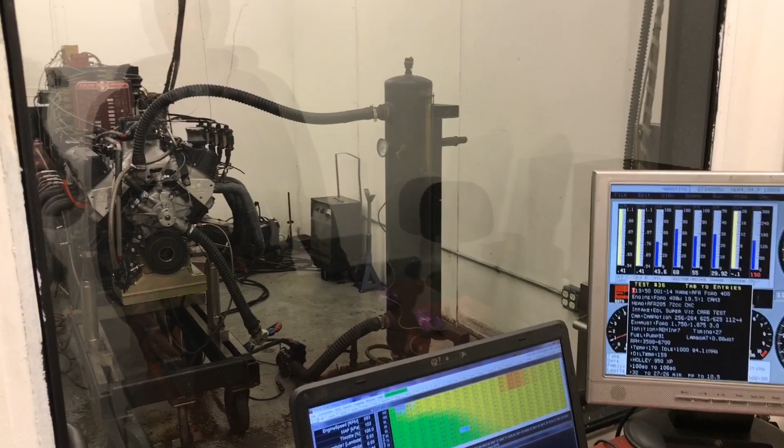So, yeah, we decided to put a carburetor on it, see what it does, and here we go. We had to do a lot of messing around with the jets to get this thing to even run right. So needless to say, fuel injection is a lot easier to tune, or at least get it consistent and right.

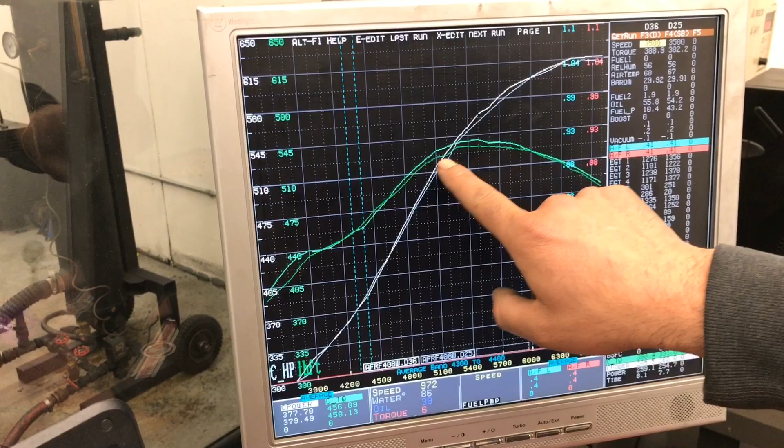So as you can see, this bright green is our carburetor run right now, and the light green is the run before with the EFI on it. Looks like it's repeating pretty good. Now, we actually still are using the coil on plug system from the AEM to control the spark, so we have the exact same timing graph.

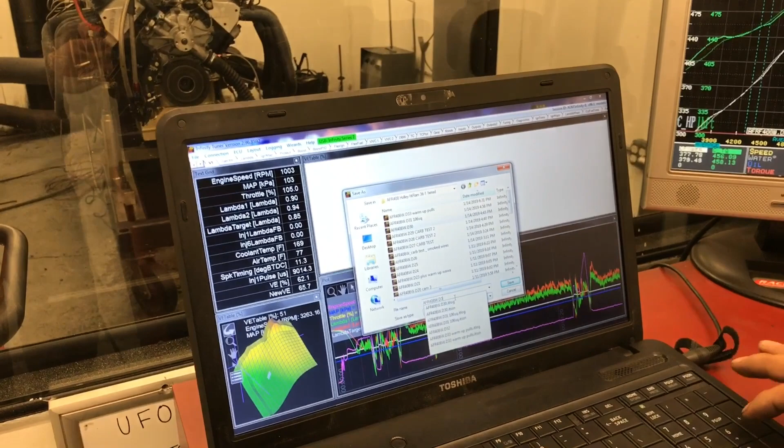And it's also telling us where our air-fuel ratio is with the carburetor. And I'll show you something right now that you'll see what we're talking about. Let's see here, save this real quick.

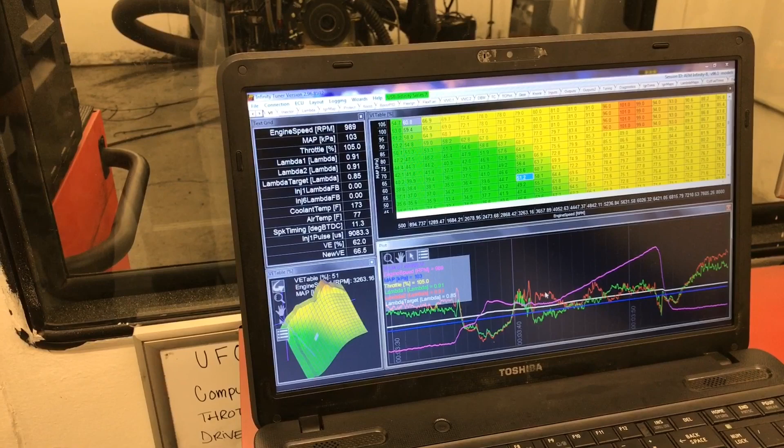So, we got our red and our green, that's our left bank, right bank, air-fuel ratio. The purples are RPM, and you can see with the carburetor, it's kind of all over the place. So here's kind of lean, here's rich. The white line is what our target is. Now, obviously, the computer has no control over the fueling part of it, but it still does the same timing.

So you can see where, with the carburetor, oops, let me open the save session. There we go. Just keep doing things to fuck this up for you guys, but it's all right. We'll get there.

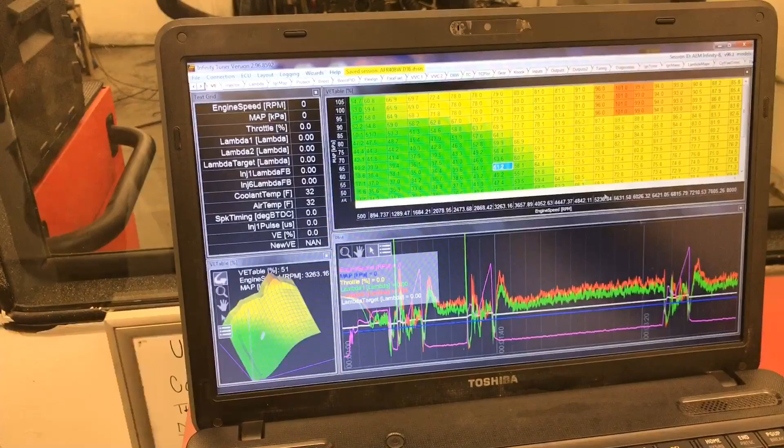Okay, so back to the last run we just did here. You can see where one bank goes lean, one bank goes rich, and then they cross over and do all kinds of fun stuff depending on what the pulses are doing now. That's the beauty of fuel injection. This is with a carburetor. It's kind of all over the place.

You can see that our lambda target, we try to keep to the same target level there. I'll pull up a graph right now, our last run with the fuel injection that we did, overlaying the graph, and you'll see the difference in what the air-fuel ratio looks like, left bank to right bank with fuel injection. And consistency is key whenever you're racing or driving on the street.

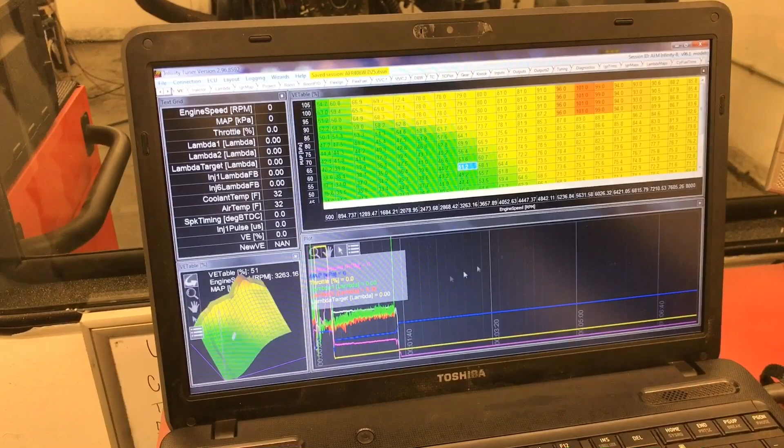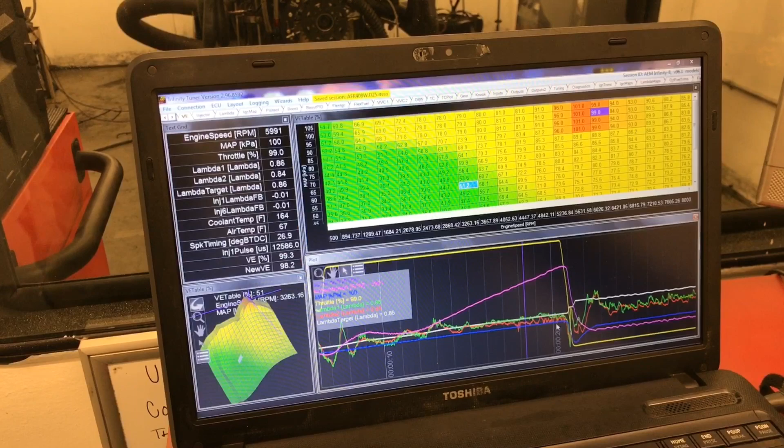Drivability, consistency, and just the ability to repeat. And that's one thing that fuel injection has over a carburetor, night and day. You can see that it's just staying pretty much right on target, keeping it close. You don't see big wide swings up and down across the RPM curve.

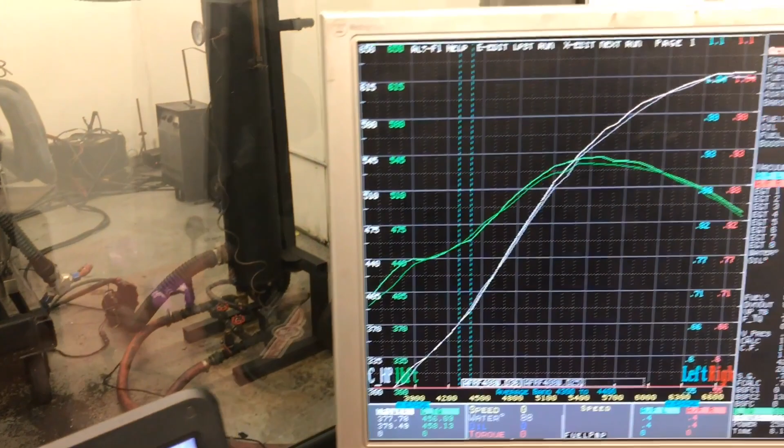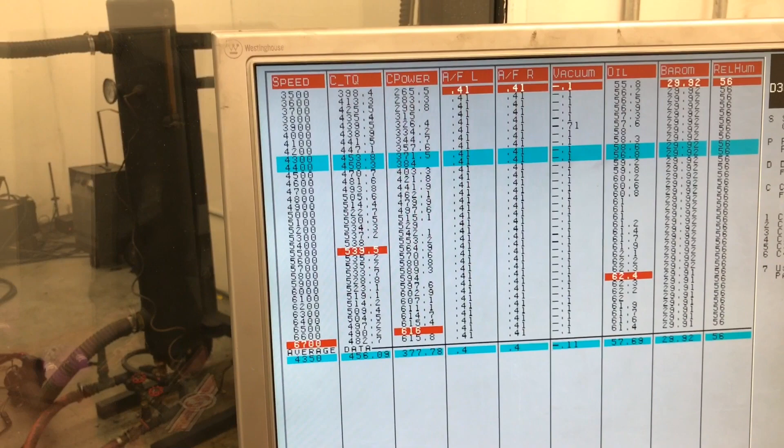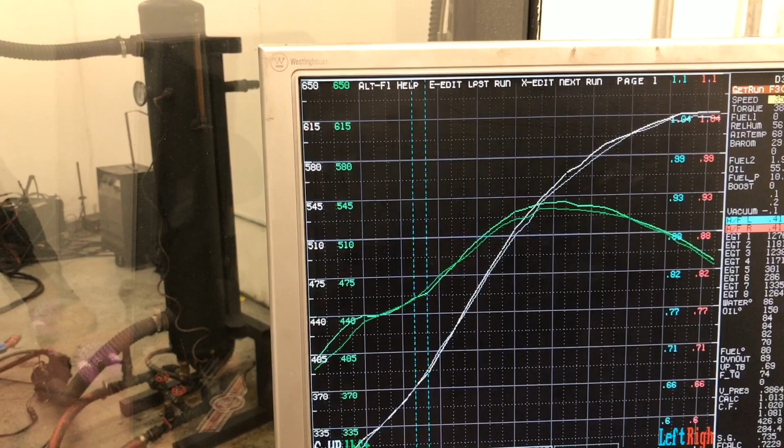Alright, so here's our numbers. This is what we did with the carburetor just now, pretty much just overlaid on the graph. Made a little bit more horsepower, I think like 3 more horsepower, and a tiny bit more torque. And I think that's because we weren't able to really keep that same air-fuel ratio. Notice the carburetor was a little bit leaner up top, which is the explanation for the more horsepower.

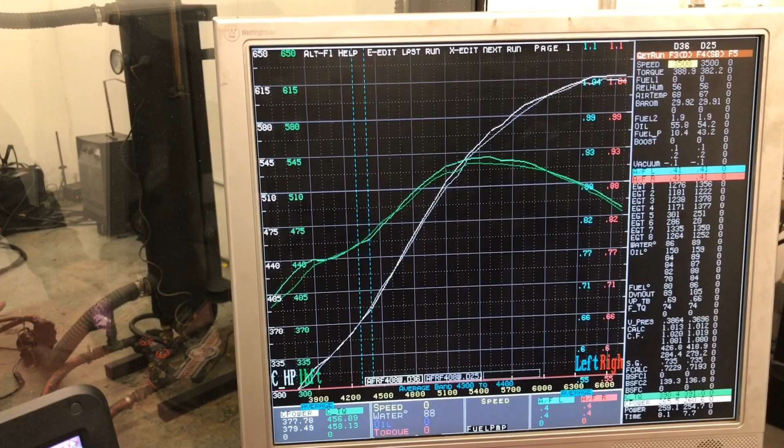We were trying to keep everything with a lambda target of 0.85, which is on the rich side for this particular application. We just wanted it to be nice and consistent and a safe tune-up. What I like to call a stupid safe tune.